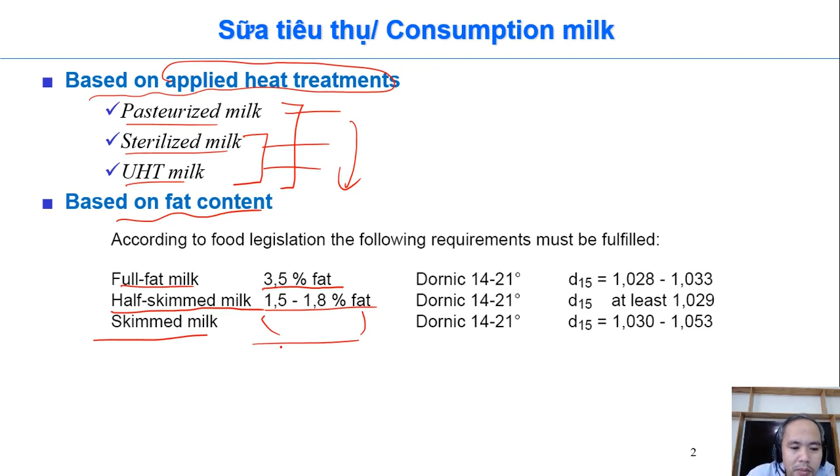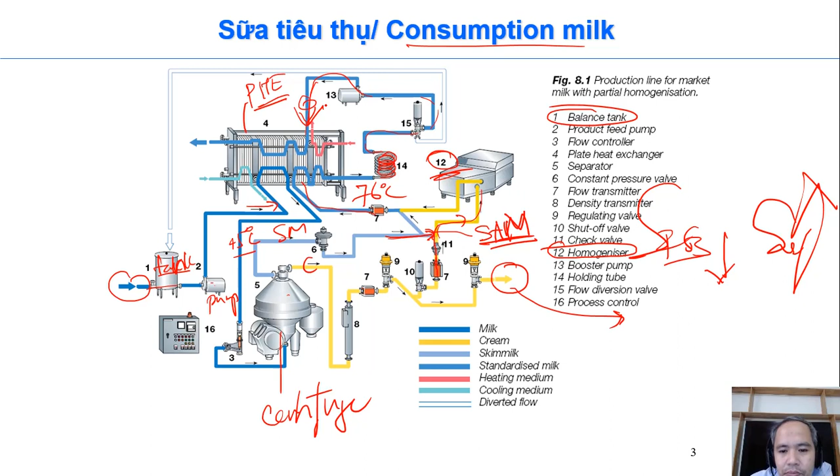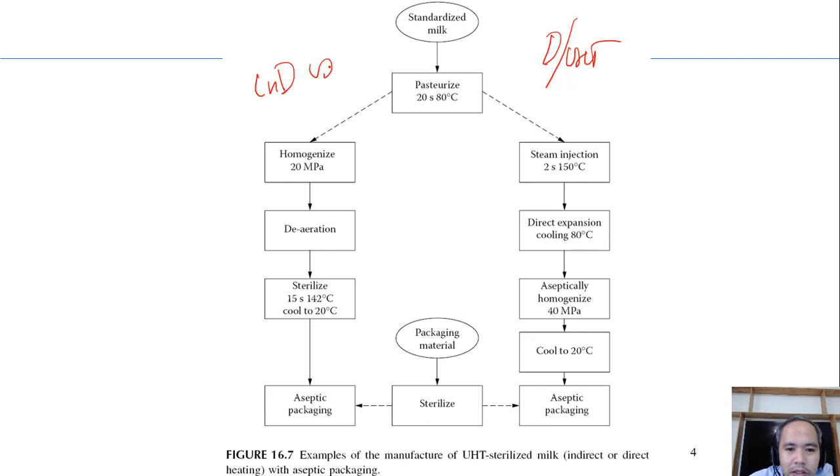And this one is to illustrate how to make UHT milk. One side is direct and the other side is indirect UHT. On the right side you have direct UHT and here you have indirect UHT. The milk which has been standardized on fat content already is heated up to 80 degrees C before UHT. For direct UHT, either we use steam injection or steam infusion. Look again at chapter 6. And then we hold only for 2 seconds at this high temperature.

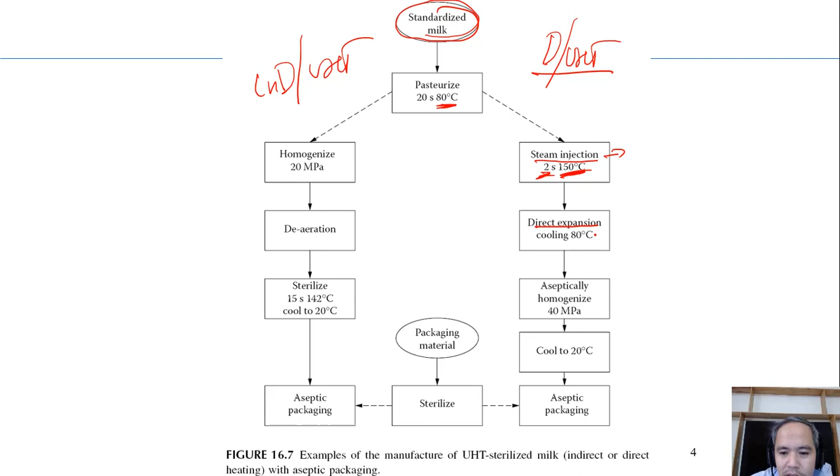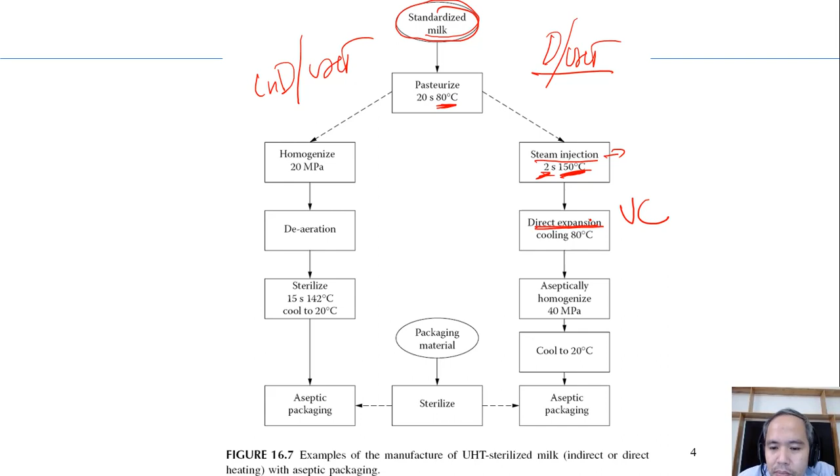With steam injection, we can increase the temperature of milk instantly, right? Very fast, like flash. And then we cool it down also very fast, flash cooling using the vacuum chamber. Direct expansion means you expand in volume, then you reduce in pressure and the evaporation becomes very fast, and that gives a cooling effect that cools down the milk very fast.

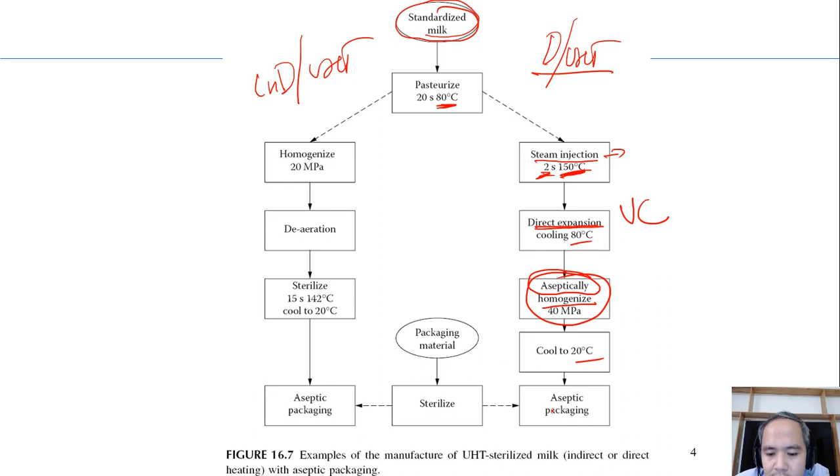And after that, homogenization in aseptic condition. Then the milk is cooled down to 20 degrees C and then pumped to the aseptic packaging chamber or to the buffering tank before packaging. But after this, everything should be in aseptic condition. After this, after the UHT.

Now for indirect, to increase the temperature of milk, you need a heat exchanger. For indirect, normally we homogenize the milk first before UHT. And before that, even the deaeration step to remove the air to increase the heat exchange efficiency. If there is more air in the milk, then the heat transfer is not very good. That's why we remove the air. Also, when we remove the air, we have better oxidative stability for the products.

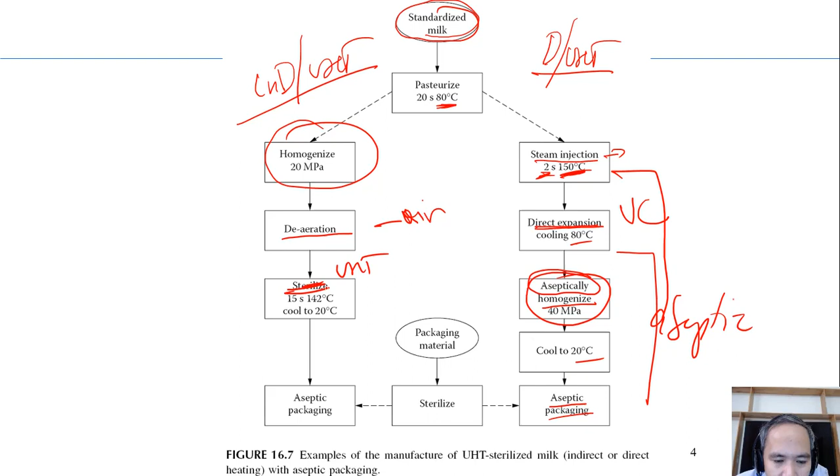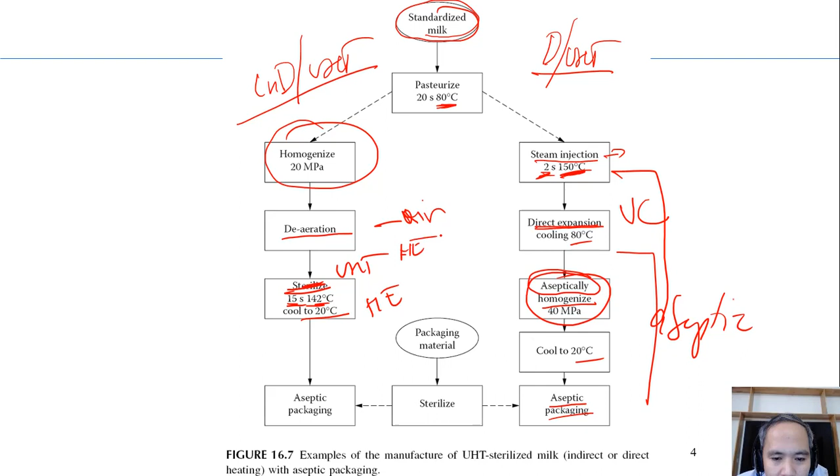And then here we apply UHT, 15 seconds, 142 degrees C. Then we cool it down. We also use a heat exchanger to cool down. We use the heat exchanger to heat up, hold, and then cool down. And then of course after UHT, the packaging should be in aseptic condition.